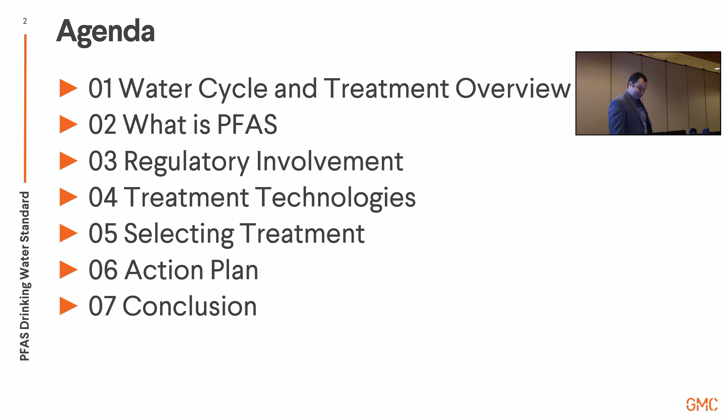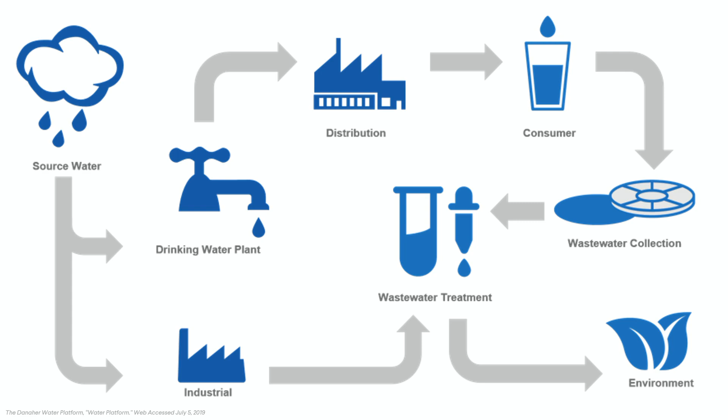Here's an overview of the water cycle. On the left, you see source water — that could be groundwater, lakes, rivers, streams, anywhere you can put an intake or a well and draw water from the environment. Because it's in the environment, it has a wide range of properties, and you have to measure those and determine what's in the water and what you have to remove to meet EPA drinking water quality standards, and here in Georgia, EPD drinking water quality standards.

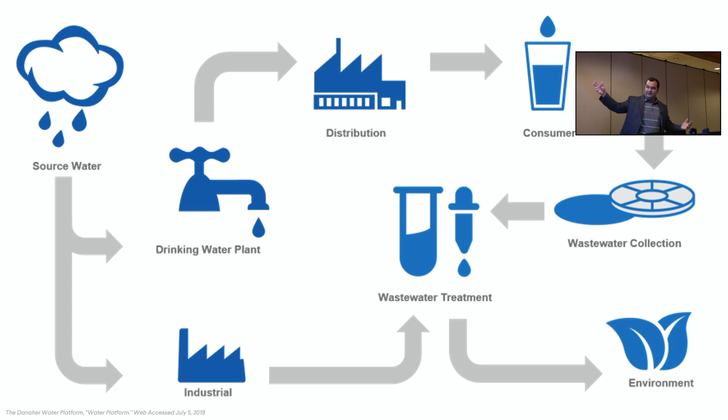Two major uses of drinking water in the U.S. are drinking water facilities and industrial facilities. I don't have agricultural listed because they're typically using that water for plants, so it doesn't go through the same treatment process as industrial or drinking water. As you can see, it goes to a drinking water plant, out to distribution, to your homes, back into the collection system, and eventually is conveyed to a centralized wastewater treatment facility if you don't have a septic tank, then discharged back into the environment where it again becomes source water.

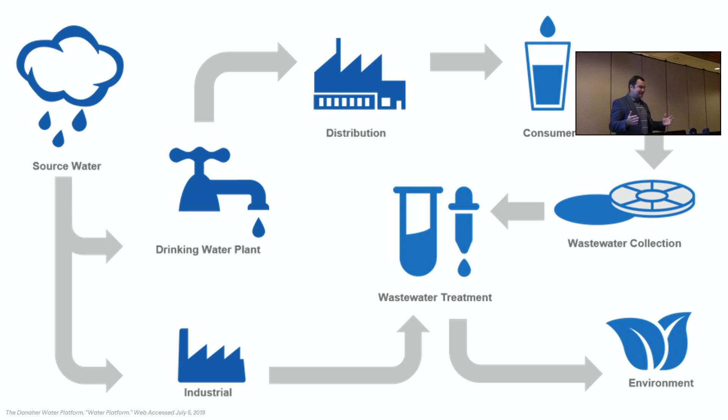So I've got news for you: the water you're drinking isn't new. It's been recycled many times.

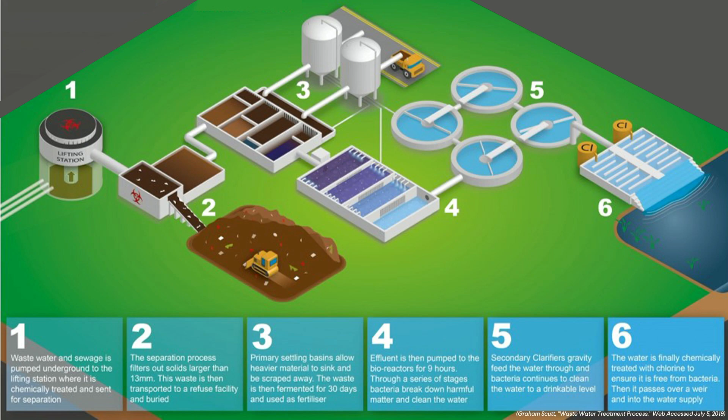After that, you pass it into a biological treatment process. Almost every wastewater treatment plant in the U.S. is a biological system where you add oxygen to oxidize things like proteins, carbohydrates, and leftover material in the wastewater, including soaps — all surfactants are biodegradable now, like your laundry detergent. So the bugs can eat them and turn them into water and carbon dioxide, which is pretty cool. They call it biochemical oxygen demand, and that's one of the main things coming into your wastewater plant that you want to remove, along with ammonia and things like that.

After that, it typically goes to a settling process that removes the bacteria you've grown. Your biosolids sink to the bottom—it's not poop at that point, it's bacteria that have metabolized what's coming into the plant—and it leaves as what people call sludge. Typically they dewater it and put it into a landfill, or you can land apply biosolids for different stuff. If you're doing Class B, you could feed livestock with it, stuff like that. There's restrictions, and that's important because we'll talk about it later. That's one way PFAS leaves a wastewater treatment plant.

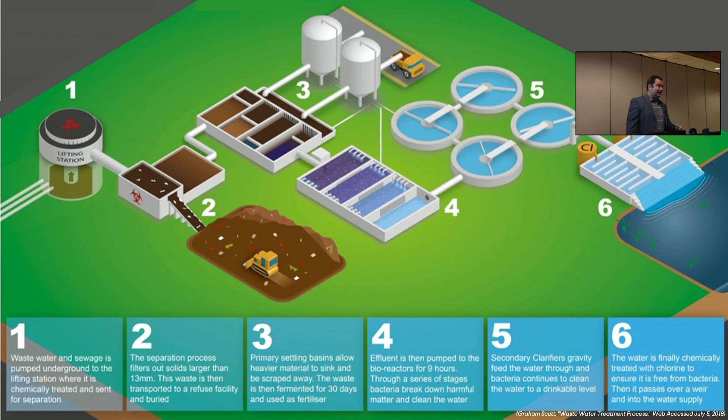But after it's clarified, it goes to some sort of disinfection process. What you see there is a chlorine contact chamber, and before it's put back into the environment, it's dechlorinated.

So here's a wastewater plant that I know and love, Augusta Utilities Department, the J.B. Messerly Water Pollution Control Plant, WPCP, in Augusta, Georgia. It's big—rated at 46.1 MGD of capacity, million gallons per day. But this is what one actually looks like.

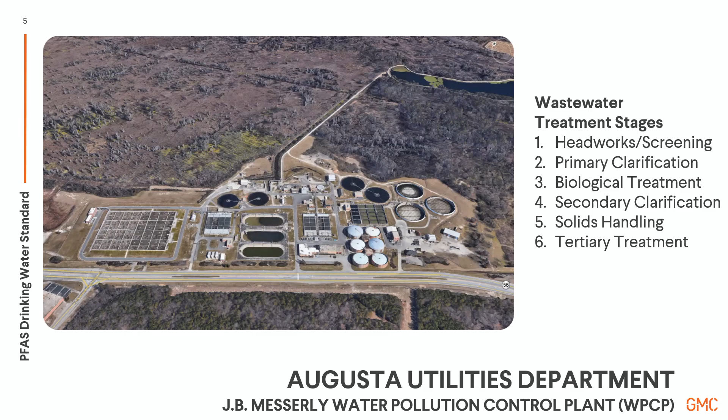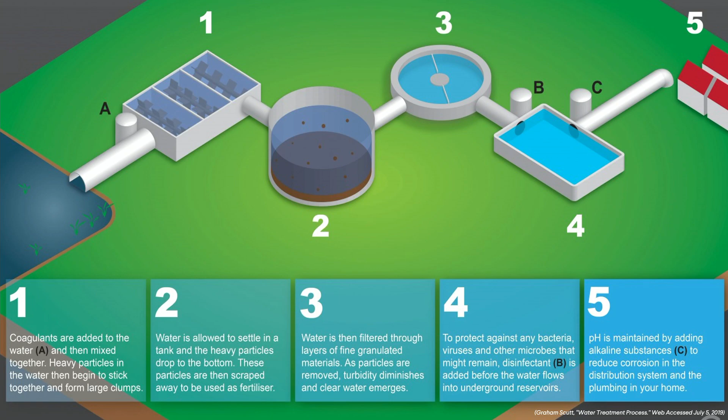In this case, it's mostly TOC, or total organic carbon, coming in your influent water, and that is also taken out and dewatered, usually sent to a landfill. After that, it goes through a disinfection process where they add chlorine, and then it's usually filtered with sand, anthracite coal, and gravel. After that, they put it into a big tank, a clear well, that you can see over here. They hit it with more chlorine, let it sit there for a while, dose it back up with chlorine, and send it out to the distribution system to get to your taps.

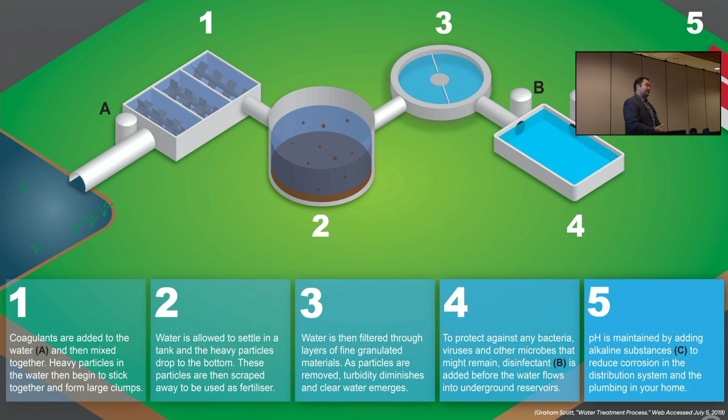So all that to say, I wanted to set the stage—this is what a traditional treatment plant is like. What's important is none of those processes are designed to remove PFAS, so you don't get great removal through either the wastewater treatment process or the water treatment process.

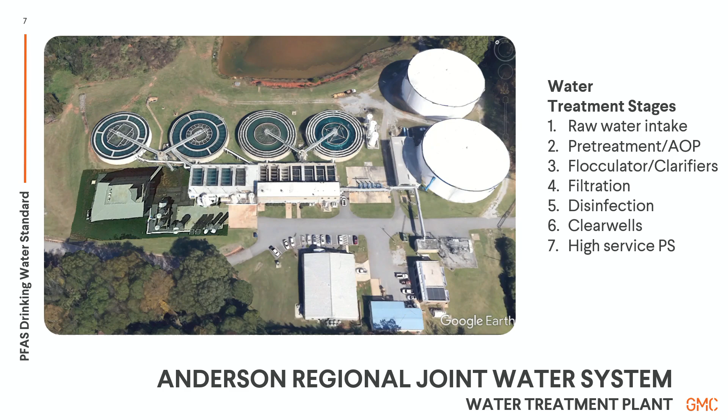Here's a water treatment plant, the Anderson Regional Joint Water System, pretty close to us actually, only a few hours away. This is what a water treatment plant looks like.

I wanted to talk about this because it was very interesting to me when I first heard about it. These compounds are being proposed to be regulated at the parts per trillion level—4 parts per trillion, actually. It's hard to imagine what that is, but one droplet of water is about 0.05 milliliters. It's 4 droplets of water in not 1, but 20 Olympic-sized swimming pools.

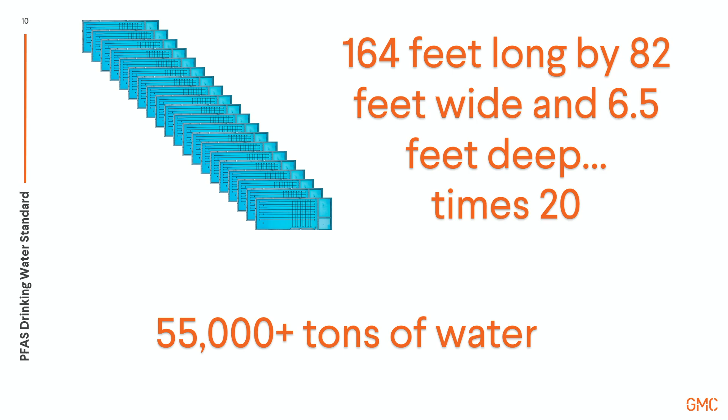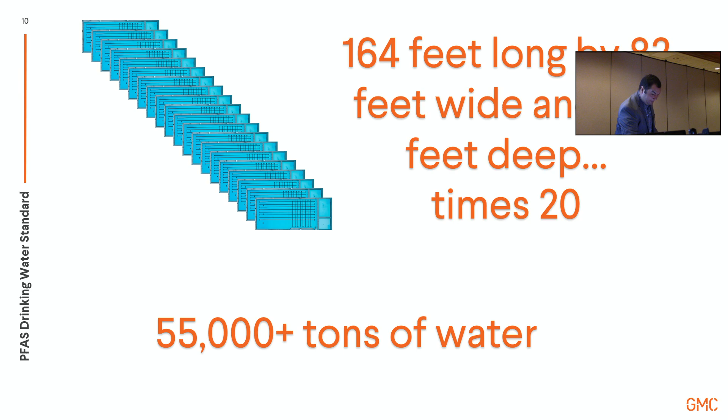It's really hard to measure when you get down to these concentrations. There's not a ton of labs in the country that can measure it accurately that low, and it's pretty expensive to test for these compounds. To put that in perspective, that's over 55,000 tons of water—a lot of water with just a little bit of chemical in it.

So what are PFAS? They're comprised of fluorinated carbon chains attached to functional groups, including carboxylic acids, sulfonic acids, alcohols, and other compounds. They're typically composed of an alkyl chain that's 2 to 16 carbon atoms long—you can see the molecular structure there. What varies is this chain, and it can affect how easy it is to remove through different technologies.

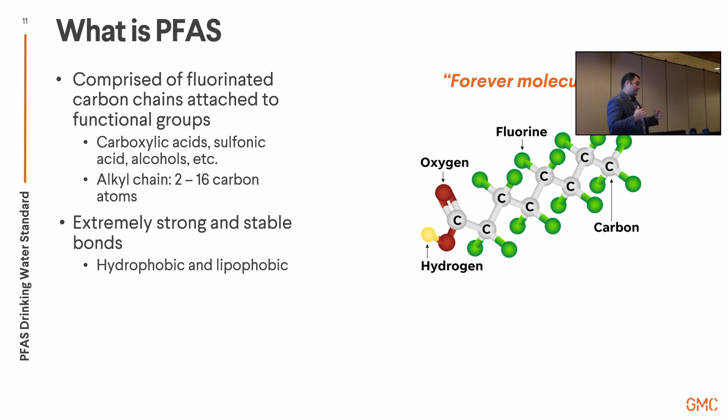What's important about them, or what initially was important and why they became so widespread, is that they're extremely strong and stable. They're both hydrophobic and lipophobic, so they repel water and also repel fat, and they're very difficult to break down—very stable, they're going to stick around for a long time. Because of that, it made them very attractive to industry, and we'll talk about what they're used in a little bit later.

But they're man-made compounds used since the 1940s. They stand for per and polyfluoroalkyl substances. You can see the breakdown here. There's PFAS, per and polyfluoroalkyl substances, and within polyfluoroalkyl substances there's PFOS and PFOA.

And then below that, PFHxS. So there's a ton of them, nearly 5,000, and it's almost impossible to pronounce half of them. You really have to practice to just get one of them. But just those top two is a good accomplishment at pronouncing them.

Well, thank you, I had to practice for a little while, so it didn't come overnight. But again, it's a broad spectrum of different compounds that are manufactured to resist stains in clothing. They also make nonstick cookware, so Teflon is a PFAS compound.

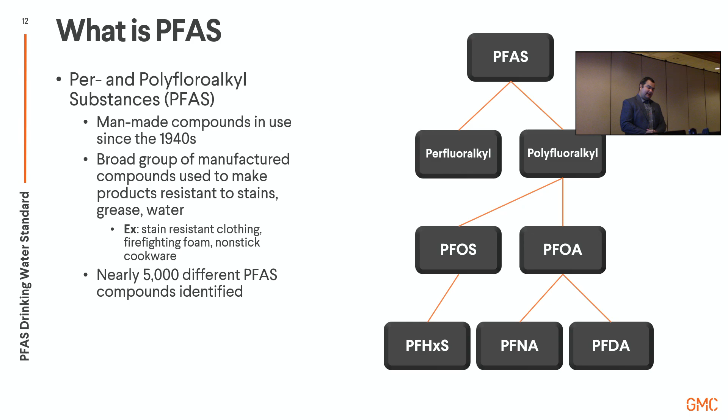They're found in aqueous firefighting foams, metal plating, textiles, photography, electronics, paper coatings, paint, hydraulic fluids, and many more. So they're really all over the place.

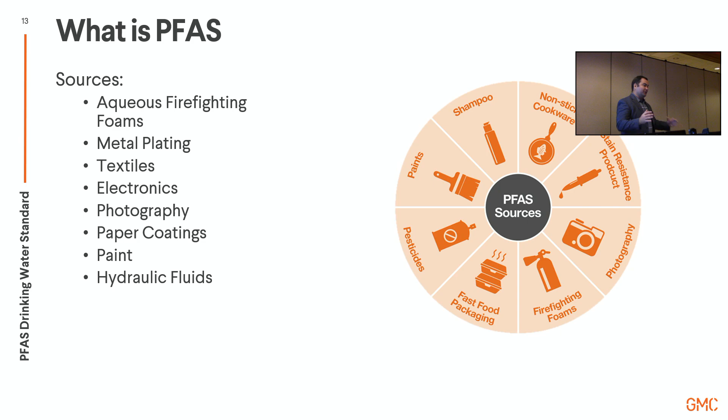So this is just a diagram that shows how PFAS gets into the environment and comes back out and is introduced to us and allowed into our bodies. So there's PFAS producing or using industries. And again, even if they're passing it through a wastewater treatment facility, or if they have one of their own, they weren't traditionally regulated.

The typical traditional methods of treating wastewater don't remove them very well. So they're making their way into our water bodies, and you'll see in a little bit how widespread they are. They're detected in just about everything, which is pretty nuts.

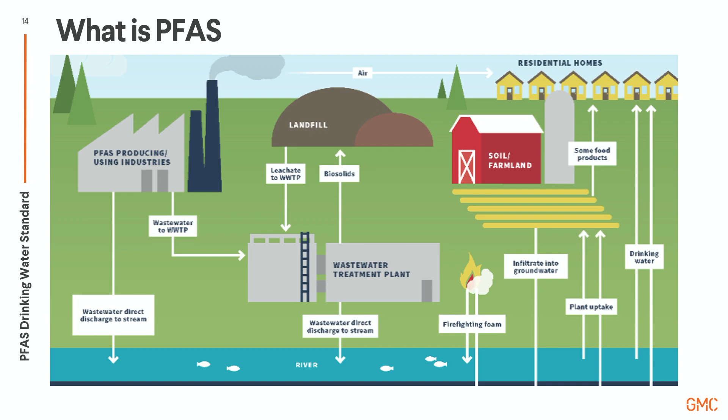And again, you see the wastewater treatment plant there, discharging biosolids, which we talked about earlier, which can contain PFAS and PFOA. Firefighting foam that's drained directly through storm drains and things like that that don't have a formal treatment process. It can actually end up in food as well and make its way to your plate, and also your drinking water.

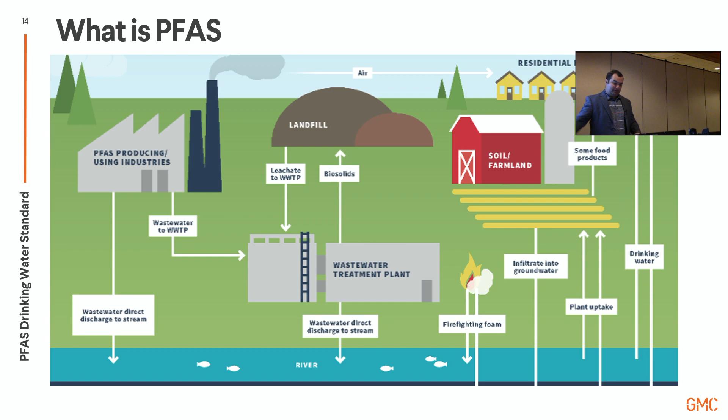So reasons for concern: there are known or suspected health concerns regarding PFAS. They are widely used in a variety of industries across the world, highly persistent, mobile in groundwater, and they also bioaccumulate. So 97% of Americans have PFAS in their blood, at least the ones they've tested. And 19 million Americans are served by drinking water systems affected by PFAS that we know of.

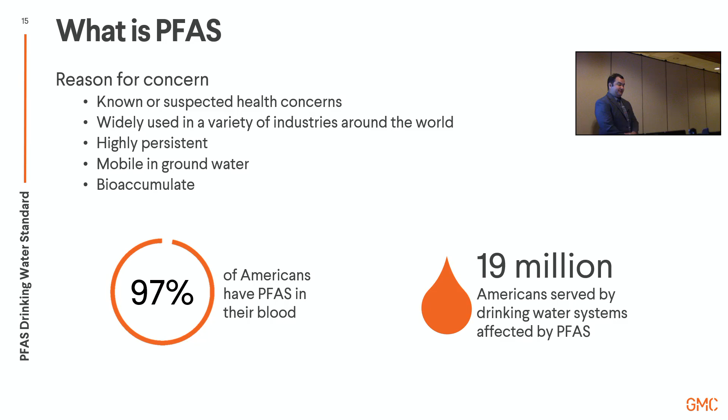So here are some of the recent—yes, Luther. What are the basic measurements for those figures you just gave us, the 97%? I haven't been tested that I know of. So out of the studies that they've done—I'm not actually, I haven't read into the study. I just know that's the number they quote typically.

So I did read on this, since I did some writing for the news release. It struck me the EPA study was a relatively small sample out of the whole country. They did not test private water supplies. These were only public water supplies that they were looking at.

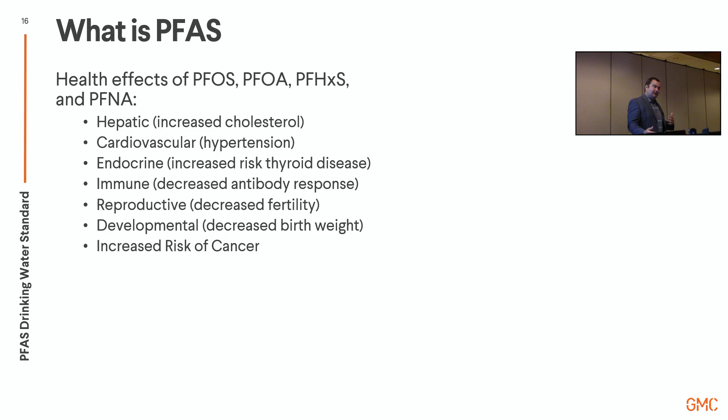So I'll say this: while the sample size may be relatively small today, it will definitely be ramping up in the future, no matter what anybody has to say about it, because it's a big topic of concern, and people are testing for it. It's going to be, if not a requirement, more and more widely tested for.

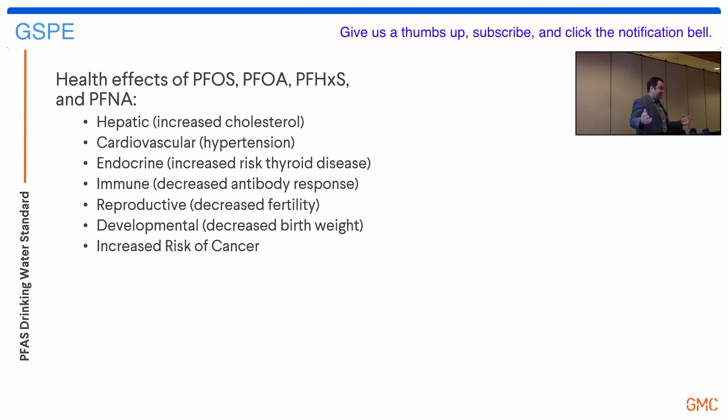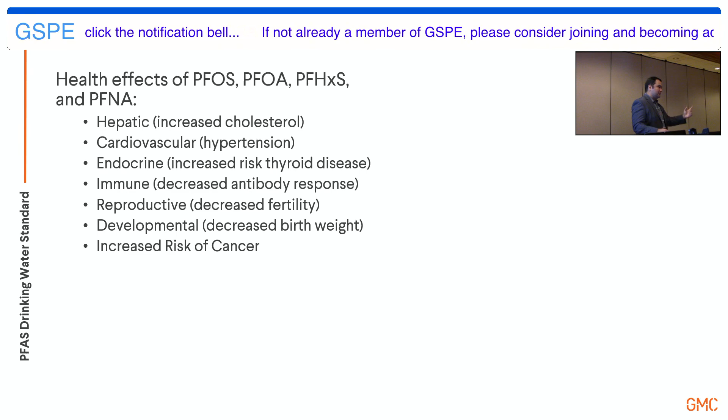So anyway, some of the health effects people have come out about recently are hepatic—and I'm not the medical guy at all—cardiovascular, endocrine system, which affects your thyroid, immune system issues. It could cause reproductive issues, developmental issues like decreased birth weight, and there have been signs of an increased risk of cancer. For those reasons, that's why the concern is around; according to those studies, this happens in very low concentrations, but can still be harmful.

Graham, I guess my real concern is they have overdone this climate problem, and I'm concerned that they'll overdo this. It's just another panic thing for us to panic over.

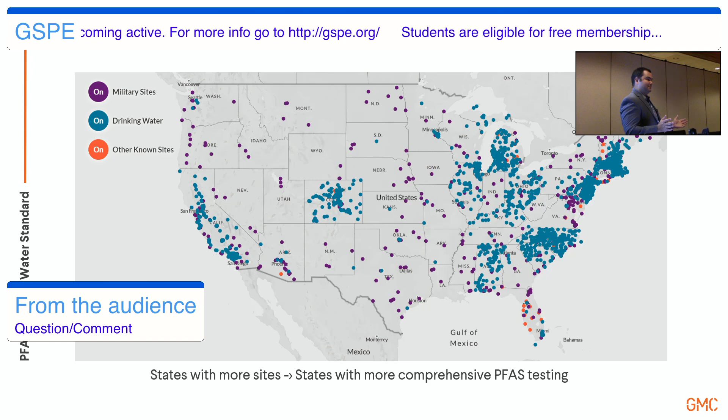Has there been anything in the way of—okay, what permission do they have to test whose blood to see that they have this? So I don't know, I really don't know a lot about how they're going about testing blood or what they're doing to actually do these studies.

Again, this is something that's being handled from a regulatory standpoint. Really my focus is what are they and how do we remove them? And if it's going to be a requirement of the US EPA, and thus EPD or SCDHEC, then we're going to have to remove them. So great questions for those entities.

I'd be curious to know their answers myself, but if they're going to be regulated, we've got to remove them somehow. So this is a map showing areas where PFAS have been detected. Some are on military sites, shown in purple. Some are in drinking water, and you'll see in a second how they're currently measuring PFAS in drinking water, and then just other known sites.

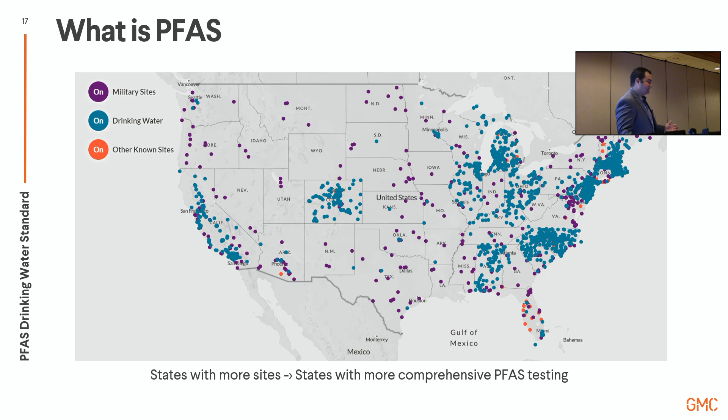What's important to note is that the states with more sites are just the ones that have done more testing right now, because odds are, if you're testing down to these really small concentrations, you're probably going to find it if you go looking for it. That explains why it breaks off at the border of North Carolina. This map is changing every day, it's probably different now already, but it just shows how widespread these chemicals are.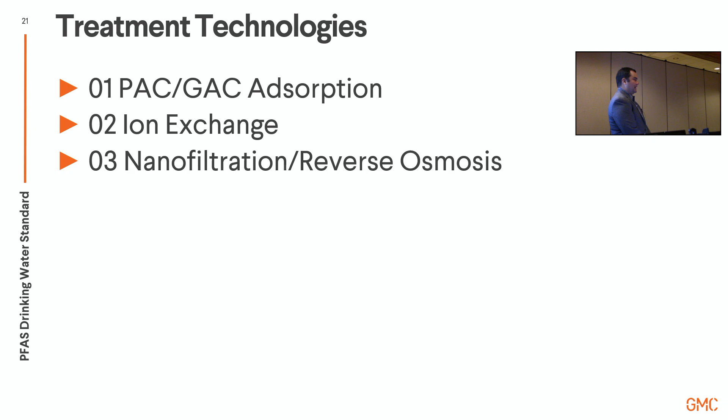So how do you treat it? How do you remove it from water, especially at these low concentrations? There are 3 treatment technologies that are currently available and widely used that are successful at removing PFAS from drinking water: PAC and GAC adsorption, which stands for powdered activated carbon and granular activated carbon; ion exchange resins; and nanofiltration and reverse osmosis, or high pressure membranes - the same technology used to desalinate.

So this is a little bit about PAC and GAC adsorption. GAC is the most widely used - typically it's a deep bed filter with granular activated carbon that you pass water through, in addition to the treatment processes we talked about earlier. Longer chains are more readily adsorbed by this method, while shorter chains have a tougher time being adsorbed. Lead-lag systems are fairly common, and they require 7 to 15 minutes of empty bed contact time - how long it takes the water to percolate through a clean mass of granular activated carbon.

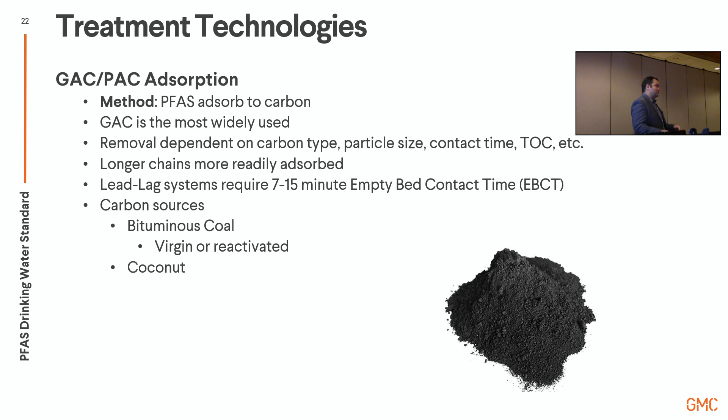Typical carbon sources for this are bituminous coal, virgin or reactivated, so you can pass high current through it. I don't really understand the electrical part of it, but it's some sort of electrical process where you can regenerate it. And then also coconut.

So ion exchange, PFAS are attracted to ion exchangers. It's a positively charged anion exchange resin, or AER, and it attracts the negatively charged PFAS.

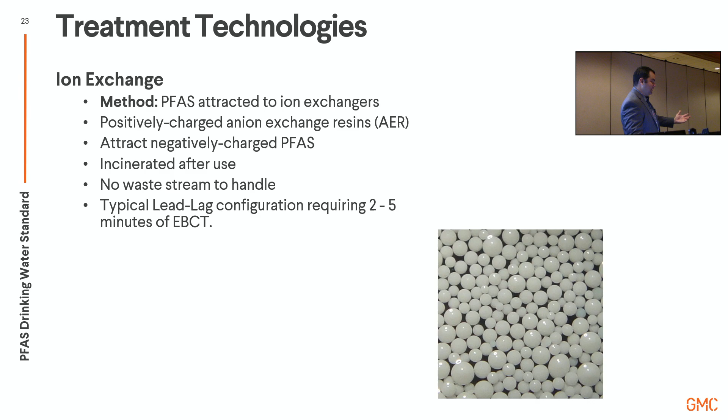There's no waste stream to handle because they're incinerated after use. Instead, with GAC, typically you have to take that to a landfill or reactivate it. And then ion exchange requires a much shorter empty bed contact time, 2 to 5 minutes in a lead-lag scenario to handle swings in flow and demand.

And then finally, nanofiltration and reverse osmosis. This one is really expensive because you have to provide super high pressure, so it uses a ton of energy. You have to super pressurize the water to get really high transmembrane pressure to drive that reverse osmosis. This is how they remove salt from seawater typically.

There's a little bit of a problem with it because it creates a really highly concentrated brine. This happens with salt water, but it also happens with PFAS. It's just concentrating that stream down, and then you've got to deal with it some way.

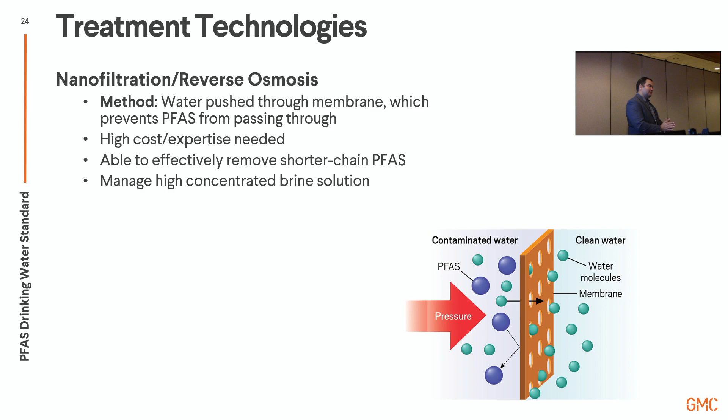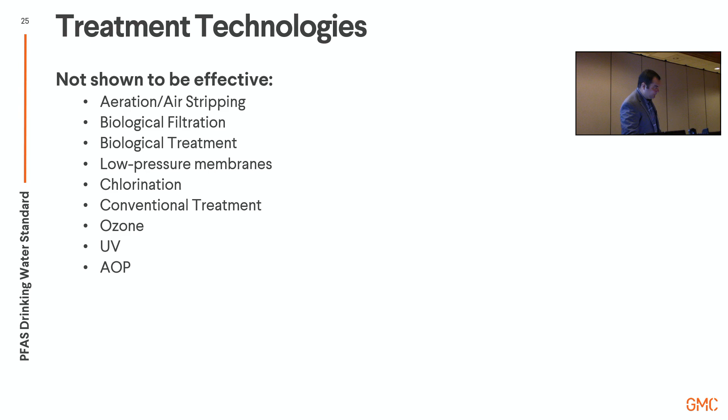So again, not shown to be effective: pretty much everything we talked about earlier, aeration or air stripping, biological filtration, biological treatment, low pressure membranes which are ultra and microfiltration, more commonly seen at water treatment plants compared to high pressure, which is nano and reverse osmosis. Chlorination, conventional treatment, ozone, UV, or other advanced oxidation processes. So really pretty resistant, there's not a lot of ways to remove this stuff.

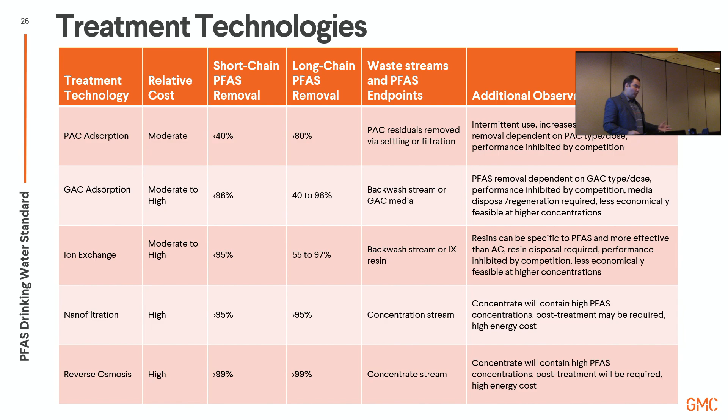So this just compares the different methods for treatment. It also displays what you can expect to remove with these different treatment technologies. Generally, as you move down the page, it becomes more effective, but it also becomes more expensive, and there are trade-offs. Probably the most effective is reverse osmosis, but it's very expensive, and also you have a concentrated waste stream to deal with afterward.

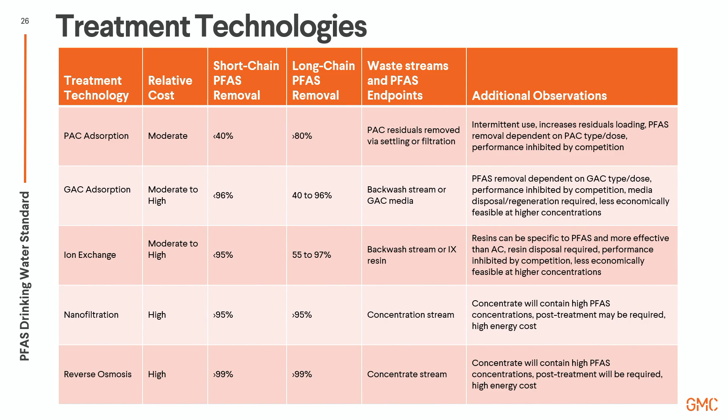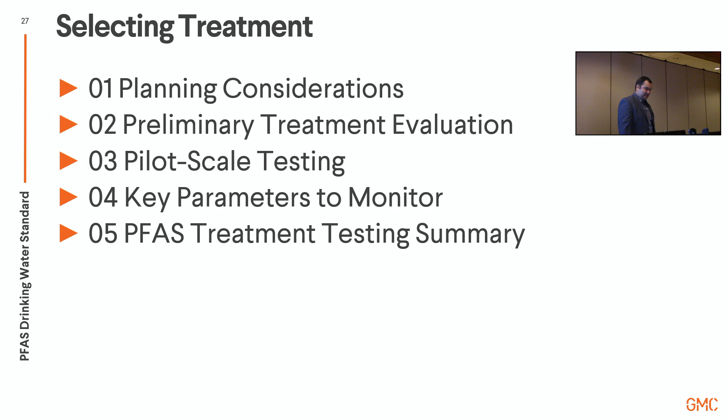So selecting treatment, how do you go about deciding which one is right for your water utility? Well, there's planning considerations, preliminary treatment evaluation to see what's actually going to work and get the removal you need, and pilot scale testing, which helps confirm that. Then there are key parameters that you want to monitor as you're doing the testing, things like total organic carbon, alkalinity, pH, that can affect how effective your treatment is. And then I'll have a little bit of a summary of PFAS testing.

So planning considerations: typically you start out with a questionnaire, distribute that to the folks at a water utility, sometimes members of the public, just to get an idea for what the feeling about it is and also what kind of treatment technology they may be most interested in. There's a lot of operational considerations and also cost considerations, so it's important to involve people throughout the process to define your treatment objectives. Obviously some of that is just dictated, but sometimes there's a goal that a water utility is trying to meet that's above and beyond that.

Water demand: how much water do you need to be able to deliver and how quickly does it change? Making sure that you have the right turn down so that your equipment can hit those low flows as well as the high flows. And then the concentration range in your influent water, what's coming in, how much of the PFAS are you trying to remove. What's your water quality coming in? Because that's also really important, there are things that can affect the outcome of how effective your treatment is.

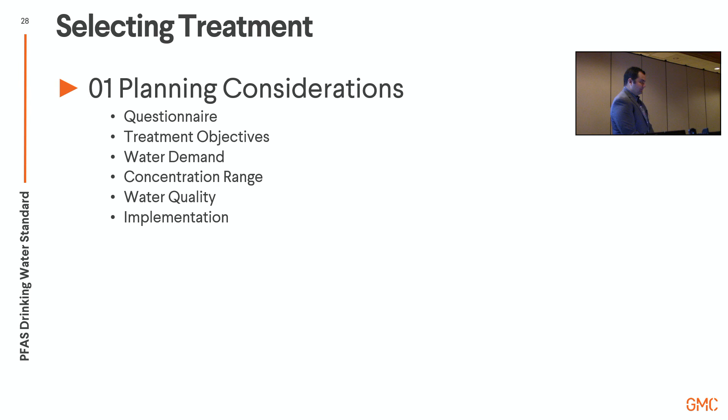And then how do you implement it? So this is some ways that you can do preliminary treatment evaluation. Bench scale testing is probably the least expensive, and it's what you would like to start with ideally.

This is different ways of testing powdered activated and granular activated carbon. You can see jar testing over there on the left, mixing up powdered activated carbon and testing the removal rates of it. An isotherm test is where you allow powdered activated carbon to be introduced to water with PFAS, again a way to measure the concentration you're able to remove. And then a rapid small scale column test, similar to a granular activated carbon filter.

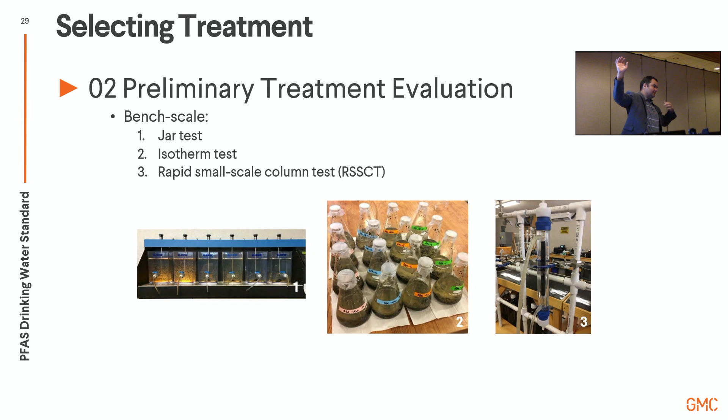Then pilot scale testing, stepping up the range of expense, more expensive. And then there's also timing and duration. You've got to coordinate with manufacturers to get equipment out to the facility, and also the facility itself, to make sure there's things like power or wash down water that they may need.

Testing conditions: you really want to be monitoring everything that's coming in and everything that's going out, so that you have a firm understanding of why your treatment may or may not be working. You want to make sure you get the right equipment, monitor it well, and have staff that are trained, know what they're doing, and able to communicate that, especially if it's a newer technology they may not have used at their treatment facility. It's important that everybody understands what it's doing and why we're doing it. And then quality control, just making sure everything's functioning as it should be.

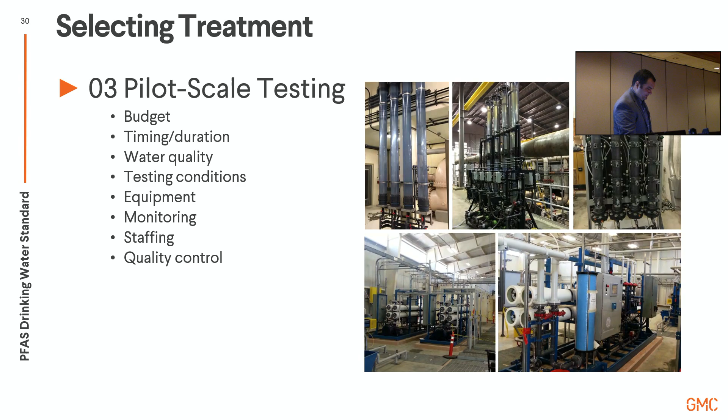So some key parameters that you really want to take a look at—pH, temperature, dissolved oxygen, conductivity of the water, which can measure how much dissolved ions you have in there, like salts and things like that. Total organic carbon, UV transmittance (UVT), oxidation reduction potential (ORP), turbidity, and the list goes on.

There's a lot of things to keep in mind whenever you're testing out one of these systems, and a lot of things that you need to understand about the water that's coming into your system. This all goes into creating a good library of pilot scale testing data so that you're able to crunch the numbers later on.

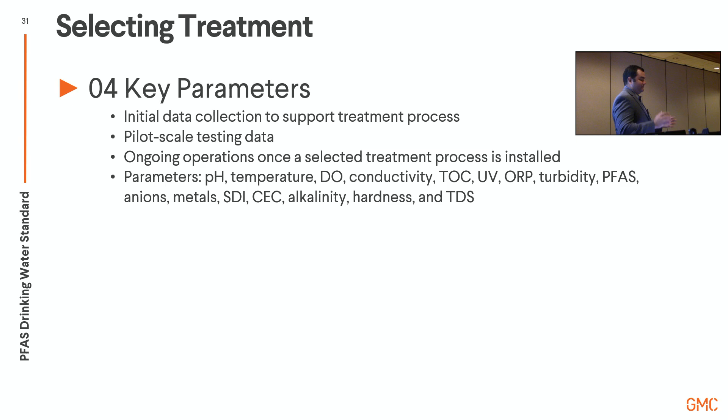When it comes time to install something that's full scale, this is the treatment testing summary. As you go to the right of this, it gets more expensive, but it's also a little bit more comprehensive, a little closer to what you'd think of as the real thing. So typically they'll start with jar testing, something like that, and then move to a full-scale pilot testing.

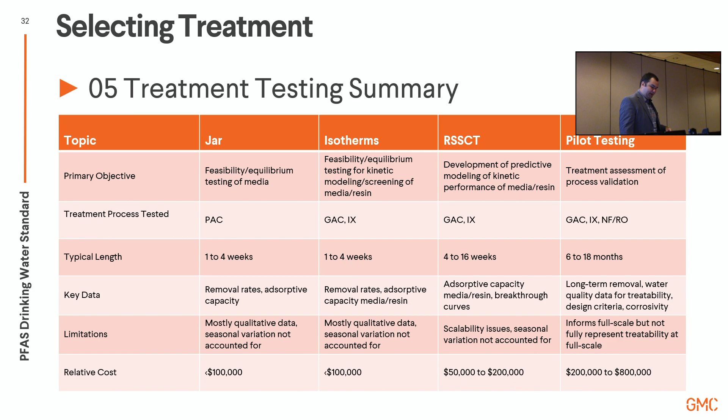There's been a lot of discussions. I mean, this is an expensive undertaking for the industry. So we'll see what ends up coming out, but there's a lot of discussion around exactly how this is going to all shake out at the end.

So some important points to note about the draft rule: the EPA economic analysis assumes the final rule at the end of 2023, so pretty soon here in January, and compliance by 2026—basically 3 years to get those in place if you have an issue, know that you have an issue, and get something installed to treat for it. Small water systems will conduct ongoing monitoring at most once per quarter.

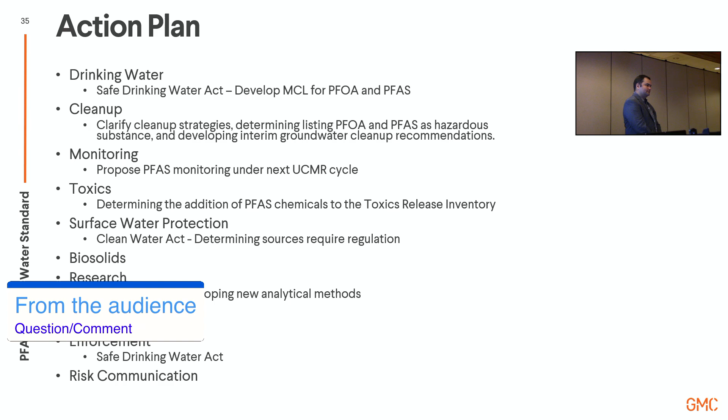Question: these fewer than 10,000, what kind of expense are they going to face in doing the required testing? So, I don't remember off the top of my head the cost of the testing right now. I think it's like a couple hundred dollars per test as it stands right now. So if you're doing a decent number of tests, it adds up pretty quickly.

I think that's the reason why they're only going to be monitoring it at most once per quarter. They're trying to limit the impact it has financially on those smaller systems that may not have the resources of a larger system. Yes, sir.

I commend you for an excellent, thorough presentation. The basic question to the average American: is our tap water going to be better than commercially purchased bottled water? How do we know what we're buying?

Some people would argue in certain ways it already is, at least in some parts of the country. So it depends on what you're concerned with. I was at a conference probably 2 or 3 years ago, and PFAS was still a hot topic, but only in water circles. People outside of it didn't really know what it was. There weren't all these articles about toxic forever chemicals yet.

But this one guy had just gotten his PhD, and he had done a study on microplastics in water, which was a pretty hot topic at the time, still kind of is. There are microplastics small enough that they can cross the stomach lining barrier and get into your bloodstream. So he was attempting to count microplastics as a concentration in water. Out of everything he tested, a wide variety, bottled water scored the worst because it's in plastic, and tap water scored the best. It had the least microplastics.

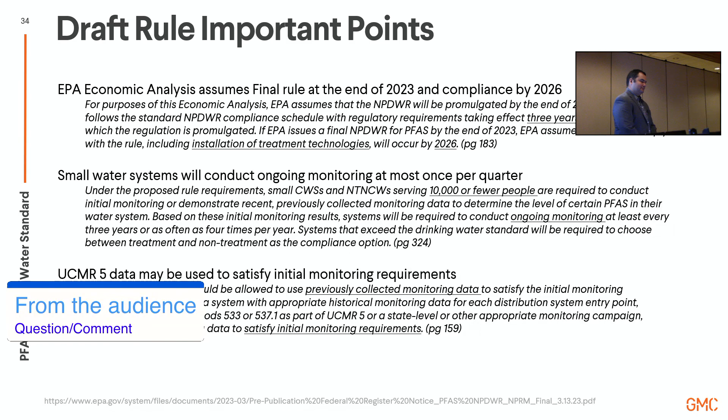That's true. Just a quick question, how do the U.S. standards compare with, say, Europe, Western Europe, England, Germany, France? So I'm not up to date with the European standards, but I'm sure that if they aren't already there, they're coming. I'm sure that whoever gets there first, the other is going to be soon to follow.

But anyway, it's interesting. Right now, it's just being regulated at the drinking water level, but there is a lot of concern, or anticipation, that it will be regulated on the wastewater side too, because ultimately, how does it get into the drinking water in the first place? It's discharges and stuff, right? So there's been even some speculation about investing in upgrading water treatment plants to remove the PFAS coming in with our water, and then further down the road they regulate it at a wastewater treatment facility, and it starts to clean up the water that's actually out there. So maybe you don't need as much treatment on the water side, but who knows. This is kind of a crystal ball prediction, but something people are talking about right now.

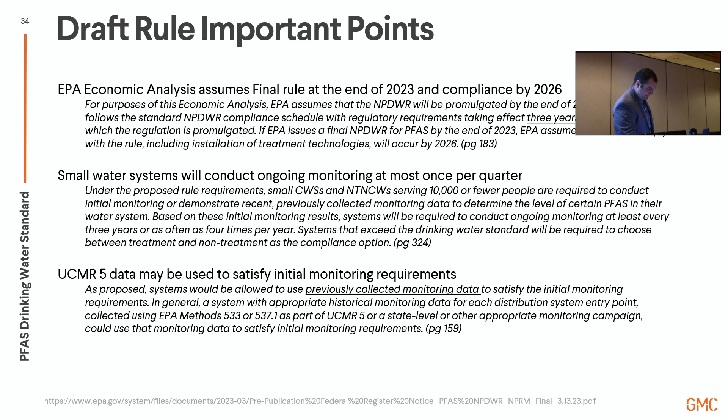MCL is the maximum contaminant level allowed in the water. It's usually expressed as a concentration—in this case, 4 parts per trillion, or nanograms per liter.

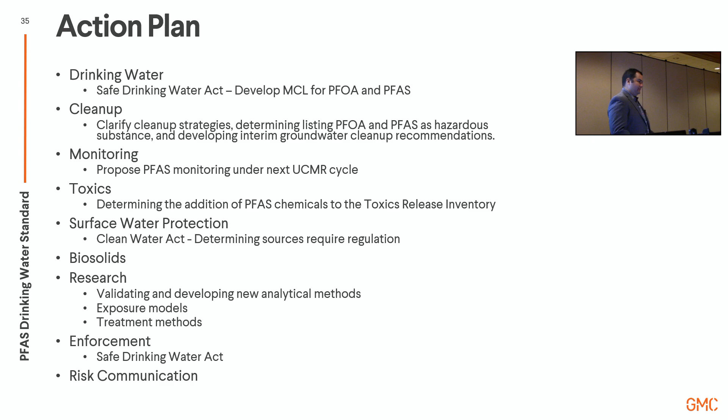Surface water protection under the Clean Water Act—determining sources that require regulation, potentially regulating it in biosolids removed from wastewater treatment facilities, doing additional research to find new analytical methods to measure these very low concentrations, exposure models for health reasons, and determining issues it causes in humans and animals. Also treatment methods for removal, enforcement through the Safe Drinking Water Act, and risk communication to the public—that's the plan right now.

So the conclusion of all this: it is widespread in surface and groundwater. It's pretty much everywhere, especially in these low concentrations. Significant research is being conducted right now and has been conducted in recent years. And there are potentially significant health concerns at very low concentrations, which is why they're proposing such low required MCLs.

It's also required to be removed through a physical process, like adsorption through carbon, some sort of membrane system, or ion exchange resin.